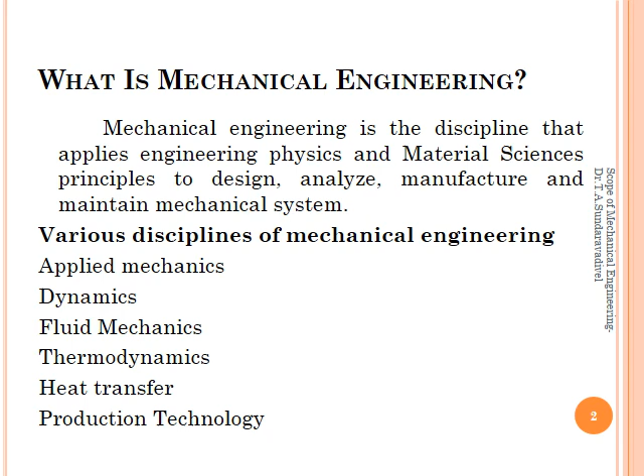Now let us see the contribution of mechanical engineering to the welfare of society. The first is the energy solution. Society badly needs more power. There is a huge shortage of electricity, and fuel pricing also rises so much. Mechanical engineers should find a green way for this. The transportation solution is the second. Millions of people die every year during traveling. Safety has to be the priority while designing new vehicles. Cost-effective products should be produced.

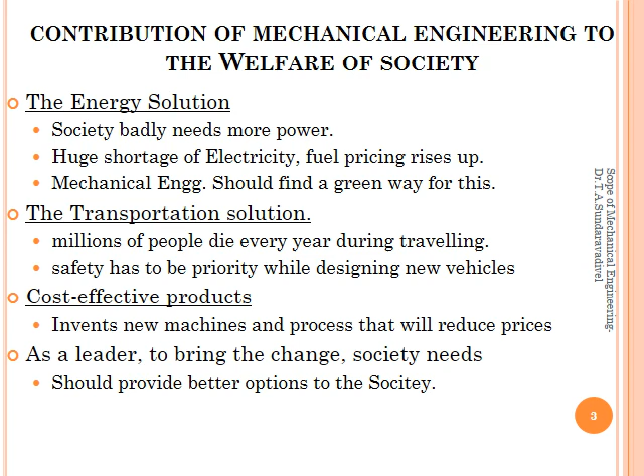Mechanical engineers also cover the development and implementation of solutions for energy and water needs of society with minimum environmental impact. They design, develop materials, manufacture, and maintain mechanical devices for a broad range of applications in all forms of industry. Mechanical engineering principles are employed in a wide range of industries such as power generation, manufacturing, energy, repair, maintenance, automation, robotics, and so on.

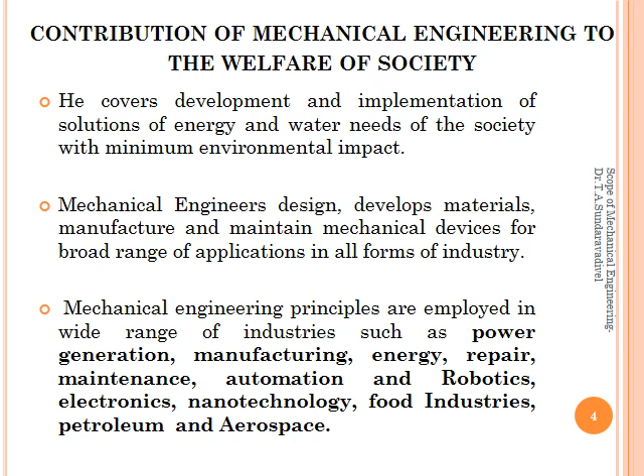The various subdivisions of mechanical engineering are production engineering, automobile engineering, energy engineering, machine design, thermal engineering, CAD, CAM, CIM, and industrial engineering. Basically, production engineering is a combination of manufacturing engineering, industrial engineering, and management principles.

What is production engineering? Production engineering accomplishes the production process in the smoothest, most effective, and economic way. Mechanical engineering with focus on machine tools, material science, tribology, and quality control is known as manufacturing engineering. They are key personnel in any organization. Production engineering comprises application of casting and other manufacturing processes, machining, joining process, metal cutting, tool design, and automation, etc.

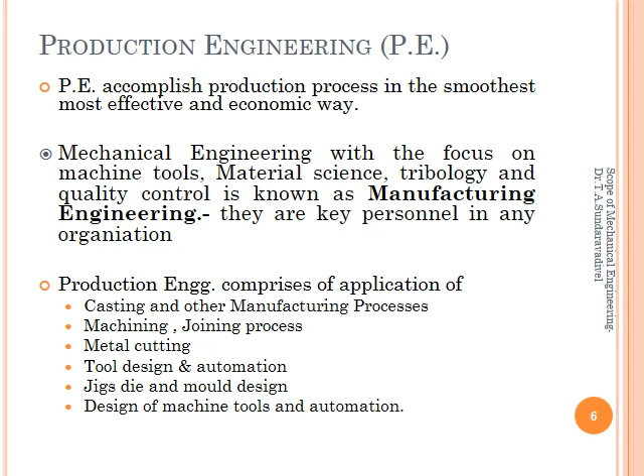What does a production engineer do? They work towards choosing machinery and equipment for the particular manufacturing process. Production engineers plan and schedule production in any manufacturing industry, for example automobile manufacturing. They program CNC machines to produce engineering components such as gears and screw bolts. They are also responsible for quality control, distribution, and inventory control. These are the basic functions of a production engineer, and there are still more.

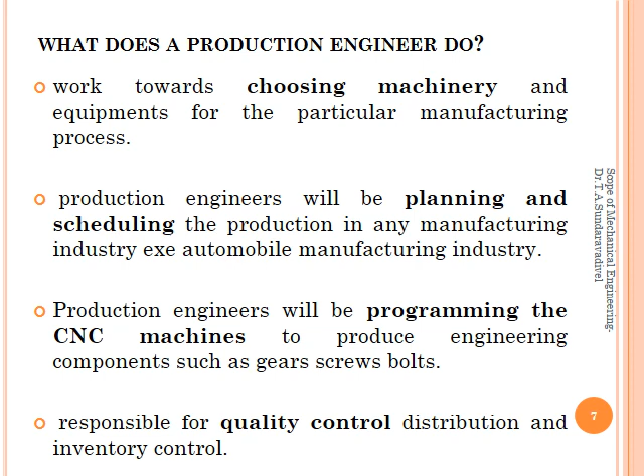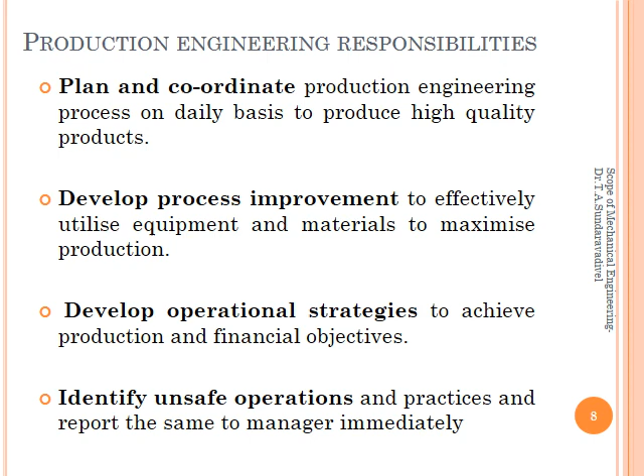The responsibilities of production engineers are to plan and coordinate production engineering processes on a daily basis, develop process improvements to effectively utilize equipment and materials to maximize production, develop operational strategies to achieve production and financial objectives, identify unsafe operations and practices and report them to the manager immediately, establish safety procedures and environmental regulations for employees, provide engineering support for production and maintenance activities to ensure maximum production, perform engineering analysis to reduce downtime and outages, and evaluate current production activities to make recommendations for improvements.

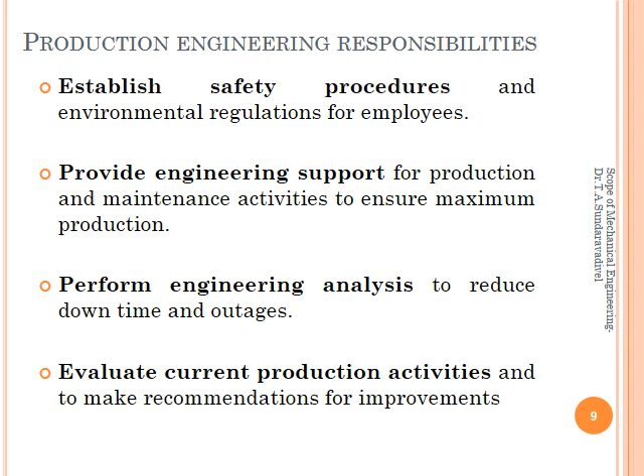They also implement cost reduction initiatives while maintaining high quality standards, develop operating instructions and equipment specifications for production activities, provide training and guidance to team members to accomplish production goals, stay current with product specification, engineering, technology and production processes, develop best practices to improve production capacity, quality and reliability, investigate problems, analyze root causes and drive resolutions, and aid in budget preparation and monitor expenses and profitability.

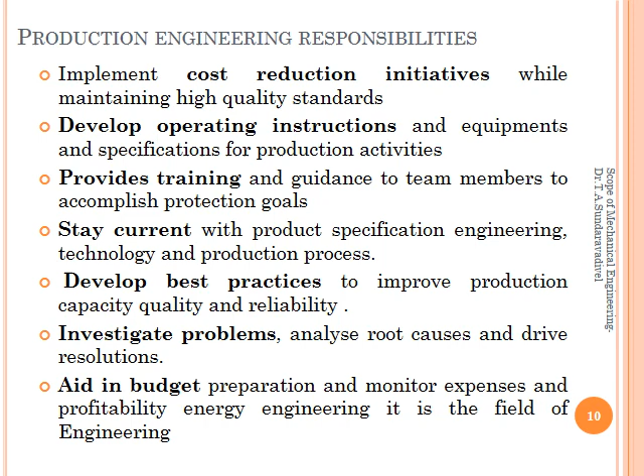Production engineering is a field of engineering. The production processes can be categorized into metal casting, which is a foundry process, metal forming, metal joining, and metal cutting. Under metal forming, we have forging, rolling, extrusion, and sheet metal forming. Similarly, under metal joining, we have welding, soldering, and brazing.

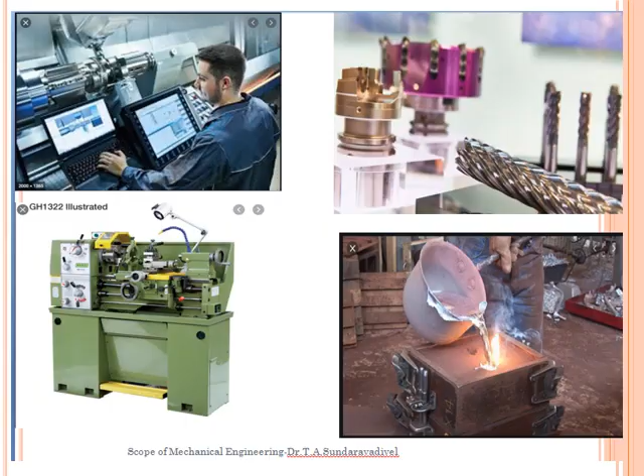Then energy engineering. It is the field of engineering dealing with energy efficiency services, facility management, plant engineering, environmental compliance, and alternative energy technology. It combines knowledge from the fields of physics, chemistry, mathematics with economic and environmental engineering practicals. Energy engineers apply their skills to increase efficiency and for the development of renewable sources of energy.

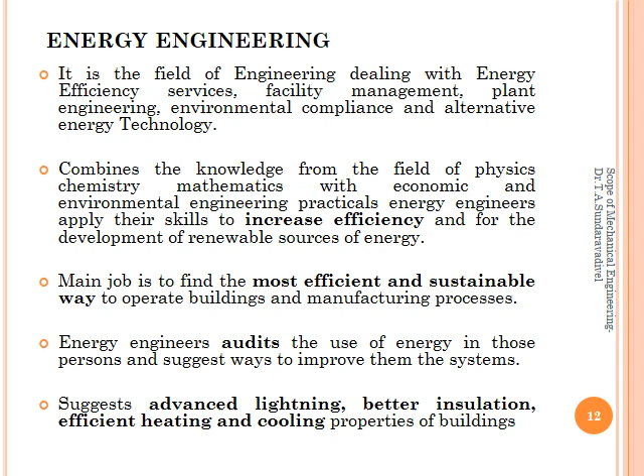The main job of the energy engineer is to find the most efficient and sustainable way to operate buildings and manufacturing processes. Energy engineers' responsibilities: they design, develop, and build renewable energy technologies, combine renewable energy patterns with existing power systems, arrange new supplies and negotiate with fuel providers, carry out site inspections and energy surveys, design and select equipment, and use mathematical and computer models to complete design and specification calculations.

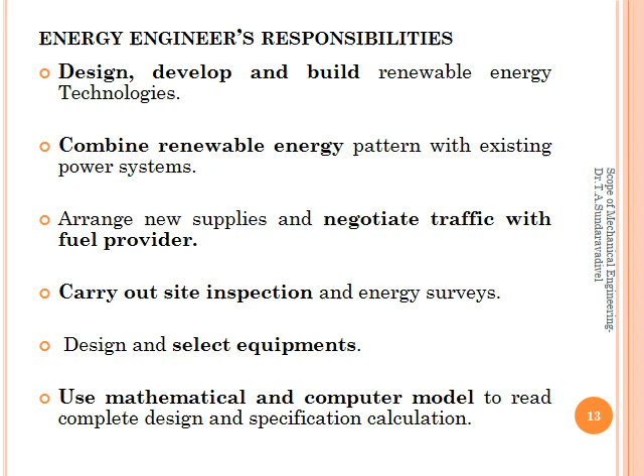They carry out lab experiments on equipment and adapt them for large scale, prepare detailed schedules of work, feasibility studies and cost estimates, check site and ground conditions for the installation of renewable technologies such as wind turbines, keep updated with legislation and environmental standards, and develop technical expertise in all matters.

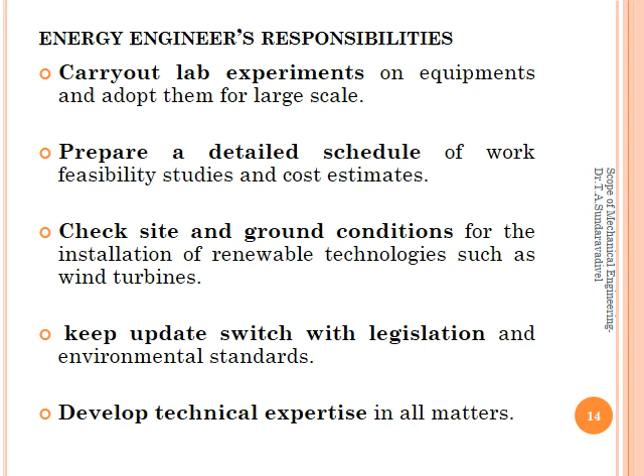Then applications of energy engineering. Energy engineering is widely applied in modern electrics as well as wireless and nuclear technology, GPS, dynamic flight simulations, Tesla coil, steam engine, rotary engine, heat pump, steam and gas turbines, and aerodynamics.

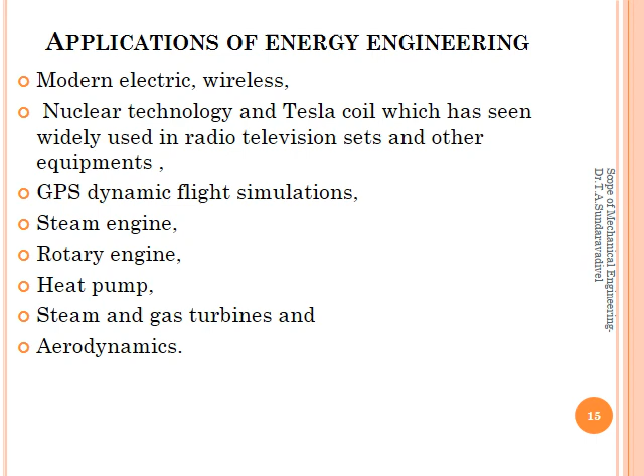The next one is automobile engineering. An automobile is a vehicle driven by an internal combustion engine, used for transportation of passengers and goods on the ground. It can also be defined as a vehicle which can move by itself. Examples include car, bus, truck, scooter, etc. Automobile engineering deals with the various types of automobiles and their mechanisms and engines.

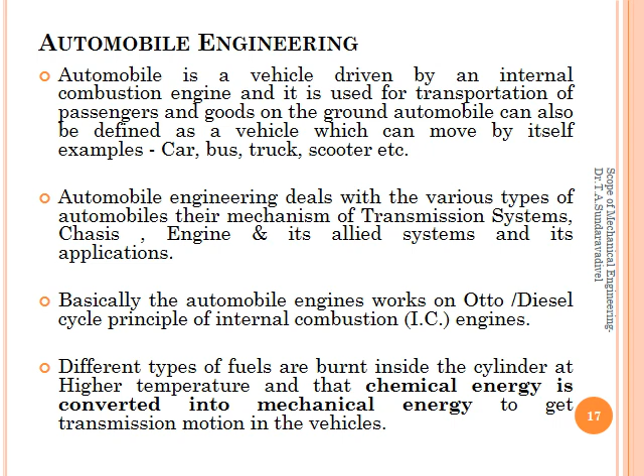Basically, automobile engines work on the Otto cycle or diesel cycle. Different types of fuel are burnt inside the cylinder at higher temperature, and then the chemical energy is converted into mechanical energy, which is transmitted through transmission. For the classifications of automobiles, they can be broadly classified into goods vehicles and passenger vehicles.

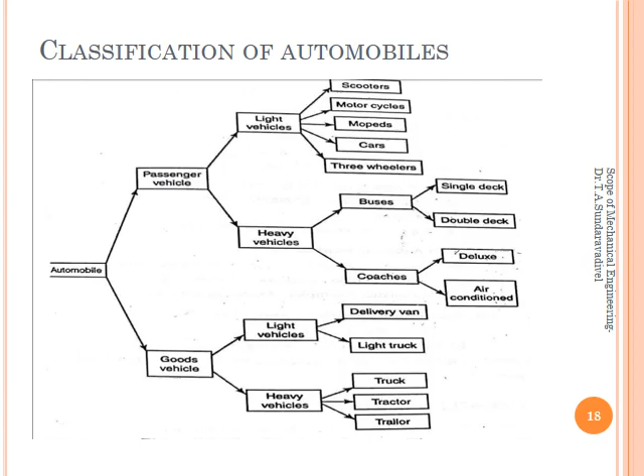These are the various activities that take place in the automobile industry. The automobile engineer should design a car, be able to assemble the car, have knowledge about assembly of the car, and knowledge of IC engines, transmission systems, and inspection teams. All these things are shown in this figure.

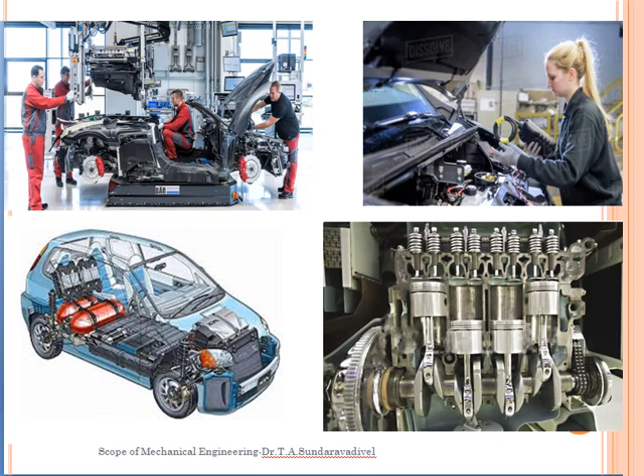Roles of an automobile engineer: assessing project requirements, agreeing and negotiating project budgets, timescales and specifications with clients, developing and implementing test procedures, building prototypes of components to carry out tests on, organizing and carrying out tests, and interpreting and analyzing results and data.

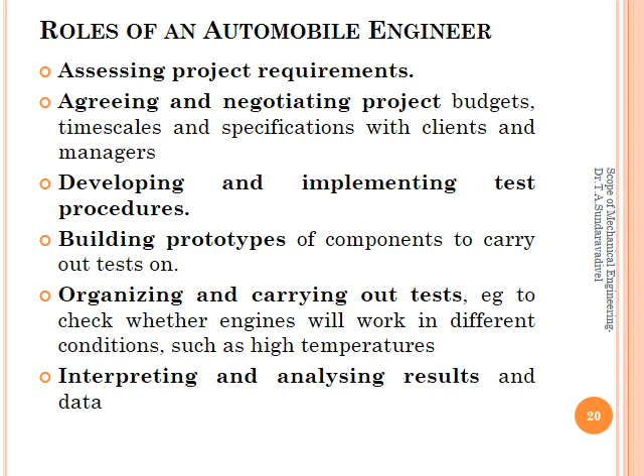Sourcing vehicle components and selecting the best material to use, providing technical advice and answering queries from clients, using specialist computer modeling software to produce designs, making improvements to vehicles in response to customer feedback, investigating and solving problems such as mechanical failures, working closely with suppliers, writing reports and documents, undertaking relevant research, supervising junior staff, and giving presentations.

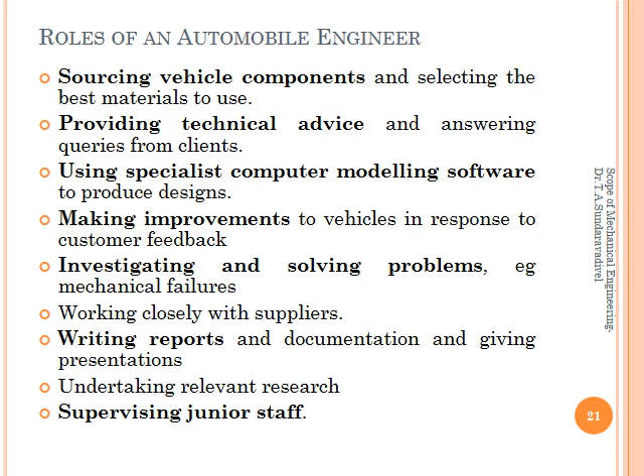What are the key skills needed for automotive engineers? Effective technical and problem solving skills, commercial awareness skill, good attention to detail and creativity, interpersonal and communication skills, presentation skills, analytical skills, good organizational skills, and the ability to work as part of a team.

Who are the typical employers of automotive engineers? Tire manufacturers, specialist vehicle design companies, research or test laboratories, motorsport teams, oil and fuel companies, suppliers, and, as usual, self employment.

Automobile engineering deals with the various types of automobiles, methods of propulsion, their mechanism of transmission, and their applications.

Now let us see the interdisciplinary concepts in civil and mechanical engineering. Each engineering discipline has its own characteristics that distinguish it from other fields. The first one is dynamics, which deals with the action of loads on bodies in motion. The fundamentals of dynamics are needed in both mechanical and civil engineering.

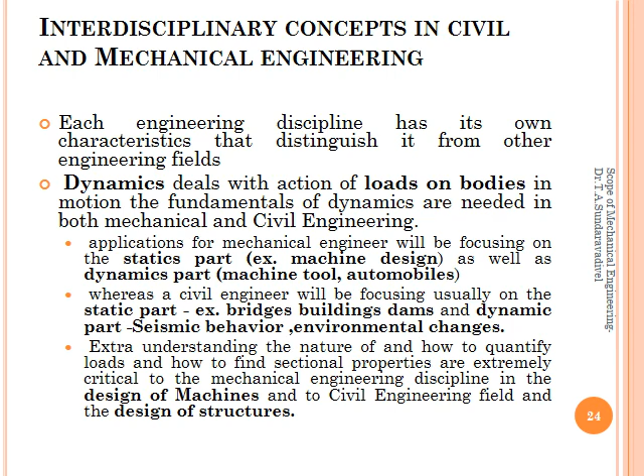Applications for mechanical engineering will focus on the statics part, example machine design, as well as the dynamics part, example machine tools and automobiles, whereas a civil engineer will usually focus on the static part, example constructing bridges, buildings, dams, and the dynamic part, example seismic behavior and environmental changes.

Similarly, these concepts will be used for design of machines in mechanical engineering and design of structures in civil engineering. Mechanical engineers need to know the loads acting on a sliding piston in an automobile engine, while civil engineers need to calculate hydrostatic force exerted by rising water.

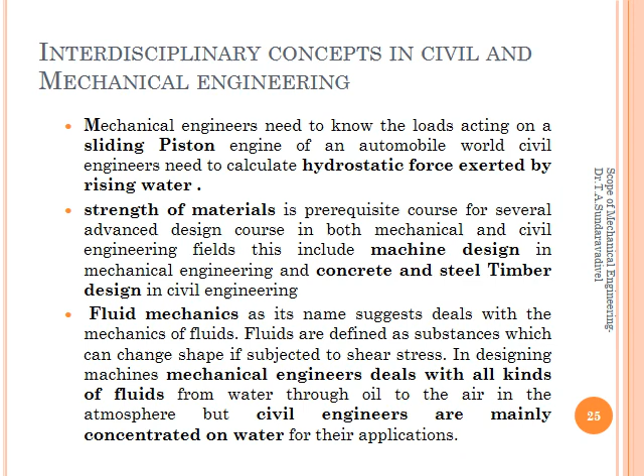Strength of materials and fluid mechanics are common topics for both branches, forming the base. Strength of materials is the base for machine design, and for civil engineers it is the base for concrete and steel timber design. Similarly, with fluid mechanics, both mechanical and civil engineers concentrate on fluids. Mechanical engineers mainly concentrate on water and other fluids including air, whereas civil engineers concentrate mainly on water.

So what are the questions we can expect from this topic, shown in this slide? What are the various contributions of a mechanical...